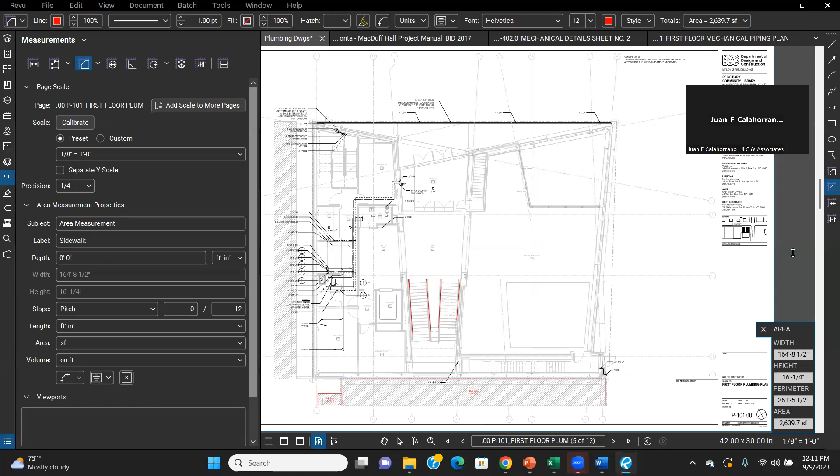Sure. Okay. Understood. I think to me the pace is good and I get to understand a lot. I've seen some of the stuff, but I don't have any questions right now. I'm pretty sure later on there will be some questions as you dig deeper into it. But overall, the class is great. We appreciate it. Awesome. Thank you. I appreciate that. So, well, we got people talking.

How familiar are we with Excel? I am good with it. Okay. I'm very good with it. Oh, perfect. Okay. So Vicky, so a lot of familiarity. And I don't do anything too crazy with it either. So I won't go too baby with it.

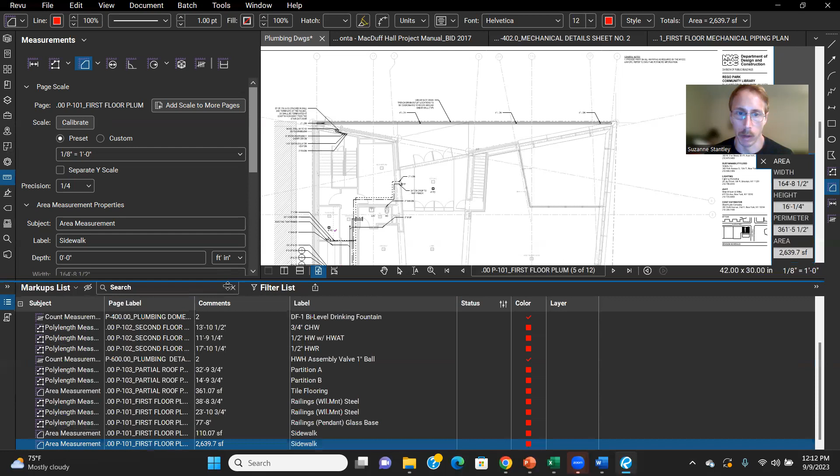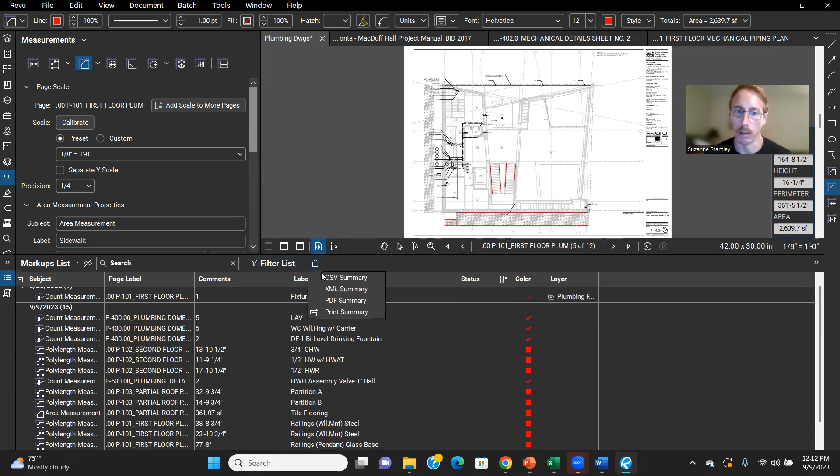So on the break, I just added a few more things just so I can have a little bit more of a report. So we're going to say we took off everything. We either got a linear foot count, an individual count, an area count, we got all these numbers for whatever scope of work. Again, this is Bluebeam. I'm not going to spend too much time on a Bluebeam specific activity. Whatever software you use to do your takeoff, 9.5 times out of 10, it's going to be able to produce some sort of Excel based output.

And again, if it's just a takeoff software, it's just spitting out numbers. An estimating software may spit out all your takeoff with values automatically attached. And that's the difference we looked at last week between a takeoff software and estimating software. We're just counting with this right now. So I'm not going to go into too much what I'm doing here, because you might not end up using Bluebeam, so that won't really be that helpful.

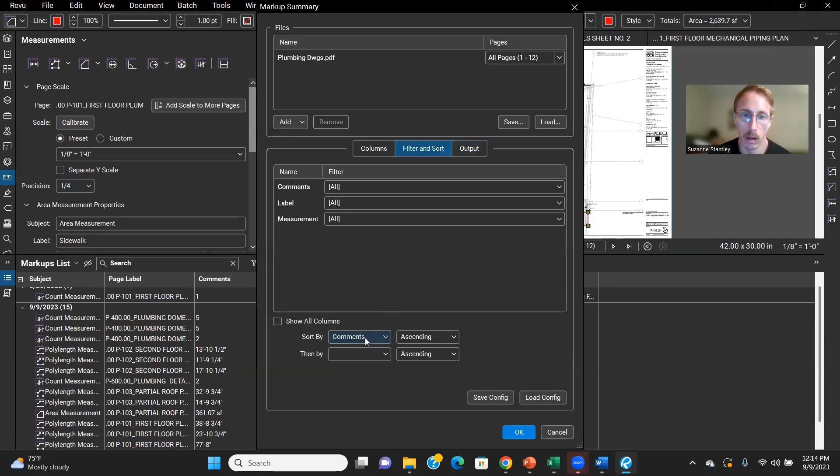But basically what I'm doing here is I'm telling it what to put on the Excel sheet, and then how to sort it out. So let's see what it produces here. I sometimes have to do it a couple times with Bluebeam. And you can see, this is the output for Bluebeam. It's fine. It's got everything I have here, but it's not the cleanest. There's ways I can play with it to make it a little better, but this is typically the output. So this would be kind of your rough counts on everything.

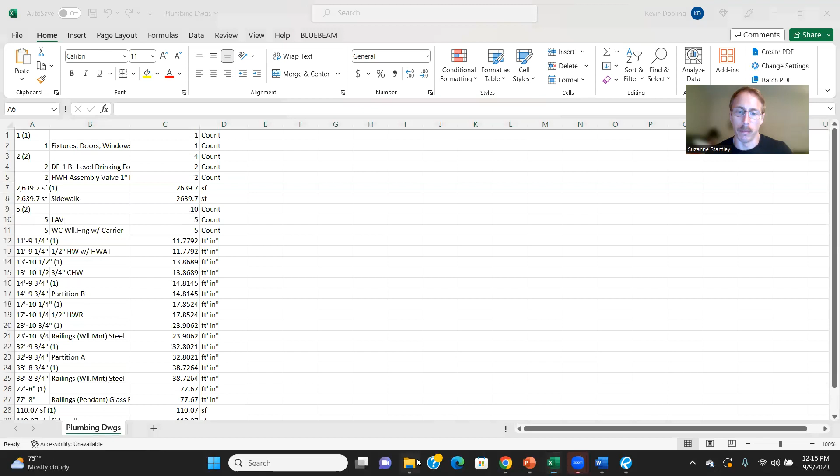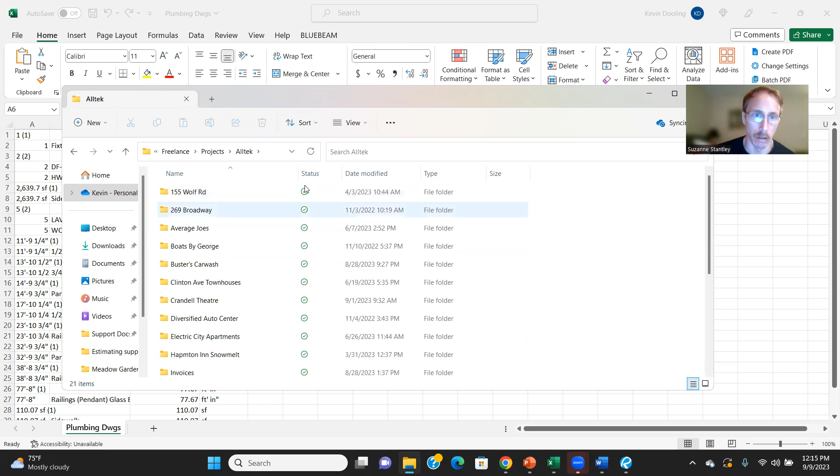Now, what we want to do is convert this information into numbers, into our actual estimate. And unfortunately, I do have an actual bid template, but as I mentioned, people put a lot of time into them, and even though we're in different states and I can't imagine there would ever be a big problem, I really just don't feel comfortable showing their proprietary bid sheet. But what I will show is kind of what I do to prepare for their sheet.

This is a step that is added because I do not have estimating software that'll spit out numbers. I need to get this takeoff, and then I create this sort of sum sheet for myself. So it's the same thing. I went through Bluebeam and I counted all these things. I've tagged them. I've got my quantities. Bluebeam didn't do anything after ABC. These were things that I added.

And this is more or less how their template is broken down. They've got a section for piping totals, a section for fixtures, a section for demo, cut and patch, testing and flushing. The company that I did this for has a pretty generic bid sheet.

There's pros and cons to that. I think it borders on too generic. They should have, maybe, a section that breaks out domestic water from sanitary. I have that information here, but if someone is just taking a quick look at one of their jobs based on their sum sheet, all they're getting is one line item for piping totals. But you can see that would be my process. It spits this out.

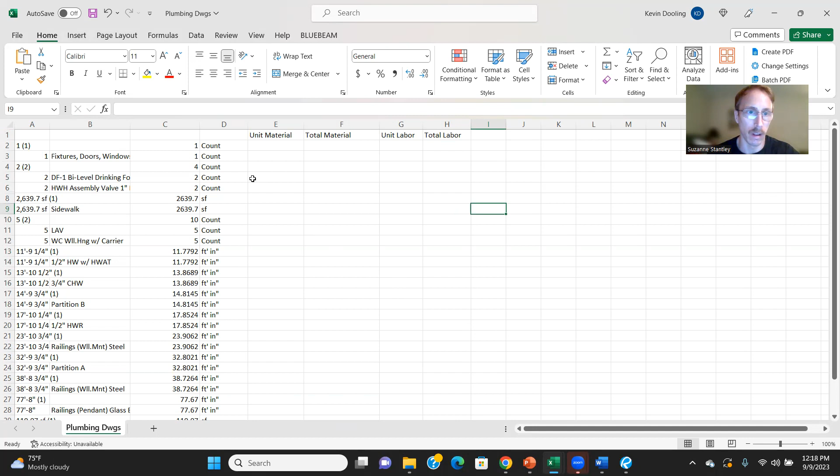So for each drinking fountain, $1,800. My total material is going to be equal to that times my count. This is going to be the same all the way down. It's going to be money. So many little things everywhere. It's going to be the same equation. So if you're familiar with Excel, you can set up a basic takeoff sheet relatively quickly.

So this is just going to be hours. I'm not putting that in material. Whenever I do a sum sheet, I collect all my hours on this kind of worksheet. And when I plug it into my final sheet, the final sheet has a wage rate. So you can see on this one, I'm calculating the total hours, because when I put all this information into that company's bid template, at the bottom, they have a spot where my total hours are multiplied by whatever they pay their field personnel.

And that way, if it's prevailing wage, or if for some reason they have to change what they pay their field personnel, it's a very easy change. You just type a different number in a box, and all the hours on the job get assigned a new wage rate, and the number comes down. So let's say we did that here. I'm not gonna do it. I went through and I put values to all this stuff, and I came out with a total. It's getting too busy. What did I do wrong here?

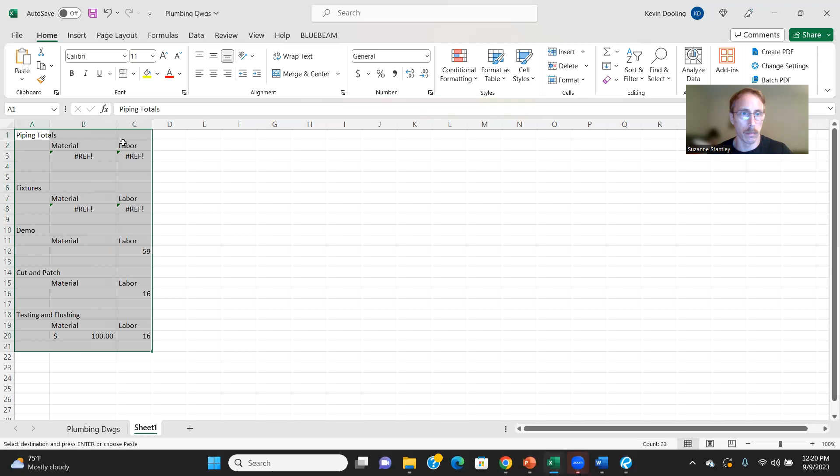Now we're just going all scopes. So we got some partitions. We totaled that to be 24,000 and 547 hours. We did some tile flooring. We figured it was gonna be 12,000. It's gonna be 365 hours. I like my things correct. All right, so let's say we did our kind of rough takeoff. We assigned values to all these numbers. And this would be something you'll have to do if you only have a takeoff summary or a takeoff software.

If you invest in an estimating software, this sheet that it spits out will have labor and material units already on them and totals already there. So it's a big time saver. You'll probably have to adjust whatever it spits out to fit your market. But that's the step you're paying for when you upgrade to an estimating software, where now I do all this and then I'm gonna put it into my final estimate. A piece of software can save you that.

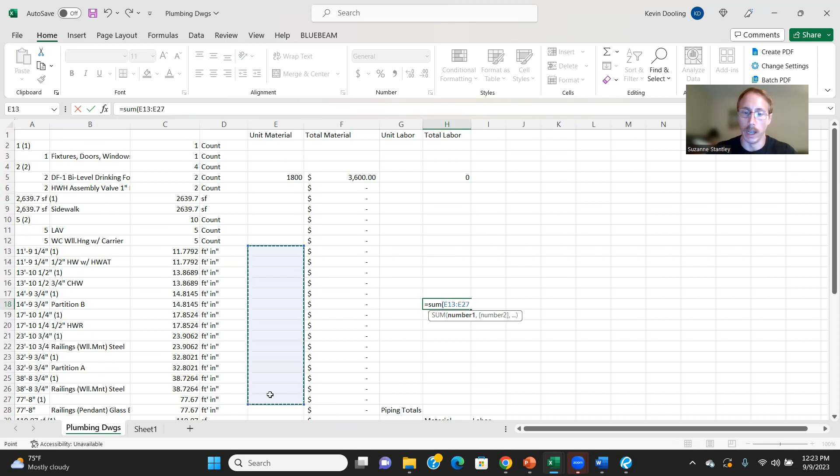So this is how I broke up my estimate. I broke it up by piping totals. I broke it up by fixtures, demo, cut and patch, and testing and flushing. But this is just for my final bid template or my final calculation sheet. If I needed to know more about my piping totals, I can go back into my takeoff, and because I labeled everything, I could just quickly do an equals sum of everything in domestic hot water. So if I needed to reference this later, I've got that information.

But on your final sheet, your quick reference sheet, and the sheet that actually spits out the number you're going to give to your client, you don't necessarily want all of this stuff on there. Your final sheet should just be super quick reference. So what I'm going to do, again, I'm doing this quick. This is something I would encourage you to really take your time on, to make it yours, to make it make sense to you and what you do, but I'm just going to go super quick. So I'm going to have a material total. Again, more references. The more references, the better for me.

And hell, you might want to be thinking, if you are hiring somebody, is this sheet something that's only going to make sense to you? That's not great either, you know? So part of when you're building this sheet, if you can nerd out on it like I can, I enjoy doing this sort of stuff, is, you know, not only does it make sense for you, is this something that you could teach somebody relatively quick?

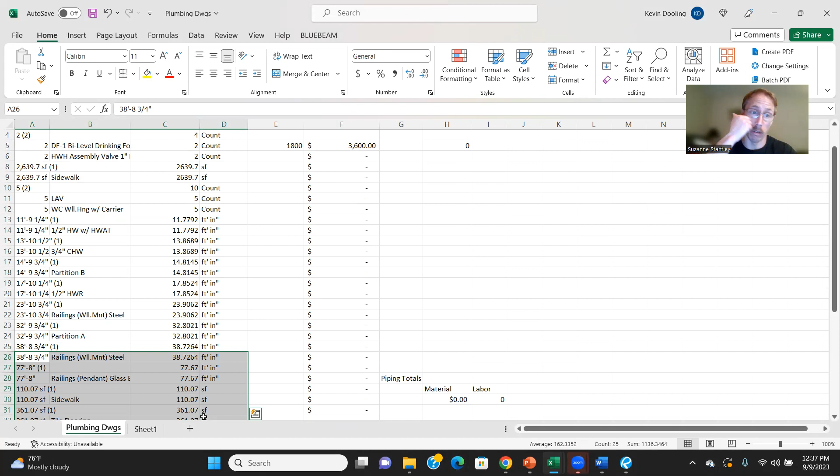For where you get your labor and material units, some of this stuff is going to be subs and vendors. You might send out this sheet, and I bet any material vendor would love this. So if you're doing railings, like ornamental steel or any of that sort of jazz, they might prefer to do their own takeoff, but you can tell them I've got 40 feet of wall mount railing and I've got 80 feet of railings with a glass base. And then you can also send them the drawings. Leave this blank until they give you a number and then fill it out with their number.

But you might have to install it. Those labor units are something from your experience. You might be able to look at that railing and say, yeah, it's about 80 feet, 2 people should be able to take it off in a day. Okay, if that's the way you want to write it in here, 2 people in a day. Is this my labor total? 2 people in a day would be 16 hours. So you could just say equals 16 hours divided by the length. So you're at 0.205 hours per linear foot.

And then maybe start keeping track of that sort of thing, using your experience to figure out what are my labor units for this different stuff based on what I know. Again, there's lots of programs out there that have labor units for all this stuff. RS Means was the one we talked about on Wednesday. That is the most general that I know of, a general pricing program, and you see it referenced a lot. I don't know if it's the best for bidding. It tends to be on the conservative side of numbers, but it's there. I would say this is better off being slowly built on experience, maybe supplemented by some sort of labor book.

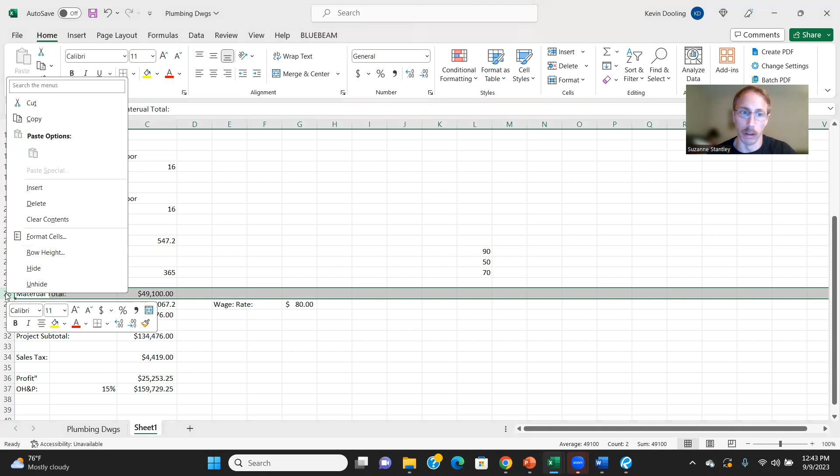A good sum sheet like this one, or not like this one because we did it so quick, but a good sum sheet that has all these functions will save you time and heartache if you get into a pinch. And there's all sorts of things that could be added to this bottom. You might have your project manager. You might add a section in there for that. If it's a super big job, they might require a safety personnel. You can have a line item for safety personnel. Maybe it's 90% blank, but it's there if you need it, and it's all linked up so that if you do use it, it all links up well.

This kind of bottom thing, that's where you're kind of accounting for the unquantifiable sections. And actually, realistically, you're almost definitely going to have a section for your subs and vendors. And that won't necessarily be a labor or a material total. It's going to be something you bought. Or, vendor will be in your material, I'm sorry. But if it's a sub, they're going to have their own labor materials.

You might have a sub category and just add up all your subs, whoever they are. If you're a GC, you're going to have a billion of them. If you're a plumber, you'll have maybe an insulator and a few others. Electrical, you might have telecom and security and fire alarm under you as subs, etc. So you might have a sheet. Again, we've got a whole class on subs, so I don't want to go too far, but you might have it continue and just have subcategories and different line items for all the subs you typically use.

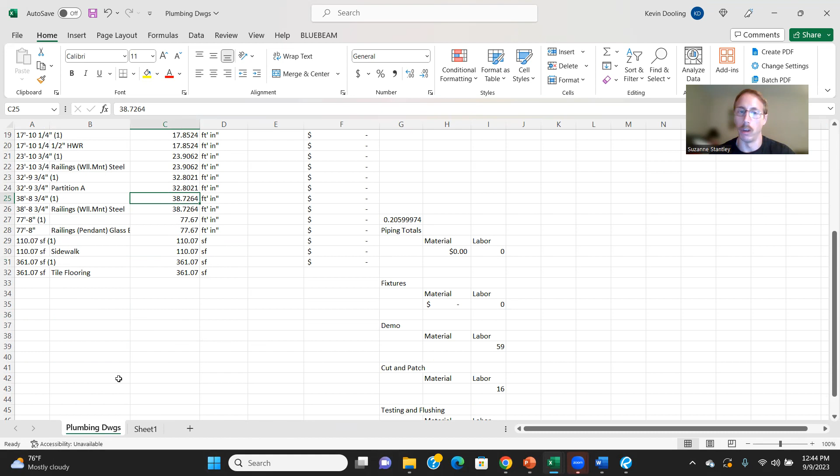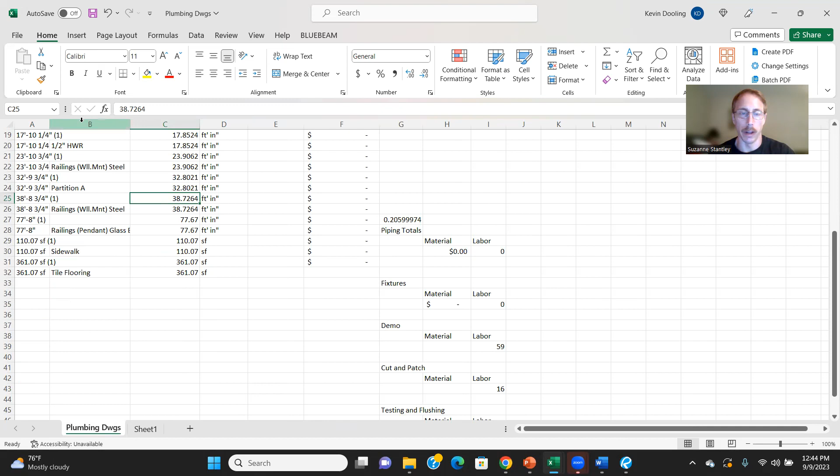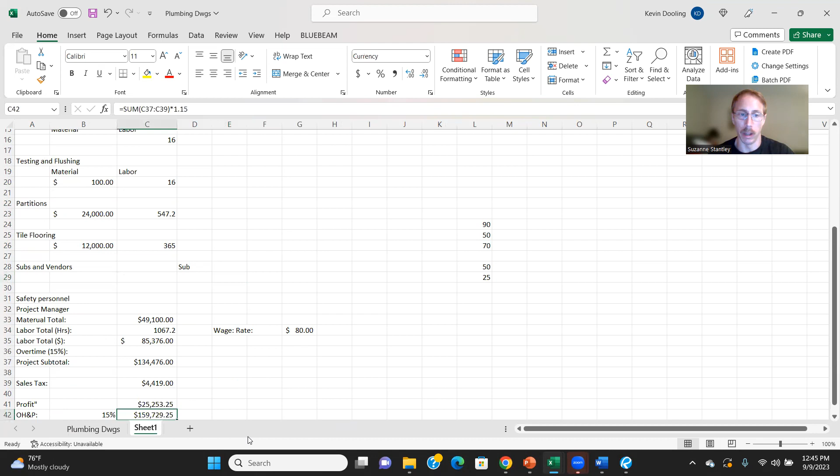So that is what I wanted to go with, kind of taking your counts, applying units, labor, material units, organizing all that information into a way that is helpful and a quick reference for you and produces a number that you can trust at the end and that you can change relatively quickly.

One thing, real quick, is if you are working on a project that is not a complete set of documents, there are some other ways to do estimating. Usually they're going to be square foot numbers. And those are much trickier. If you are the type that likes to put together an estimate based on your experience, that's kind of your time to shine. Because it's just going to be a lump sum number. Usually your domestic water, partitions will be one lump sum number. Interior construction might all be lumped together.

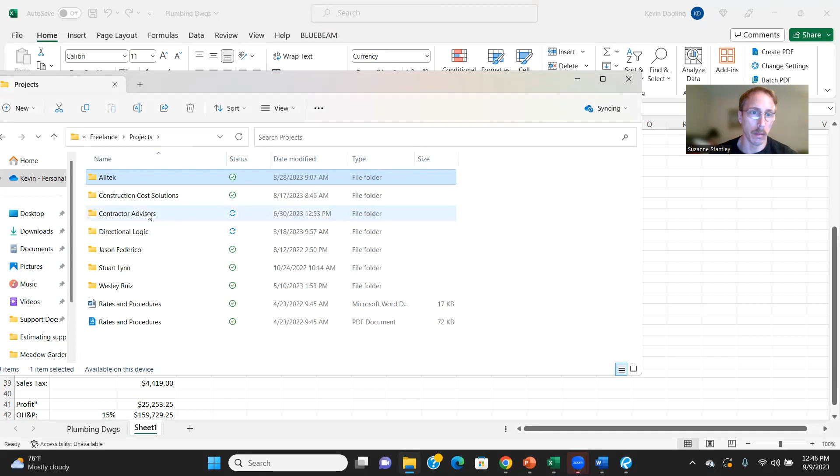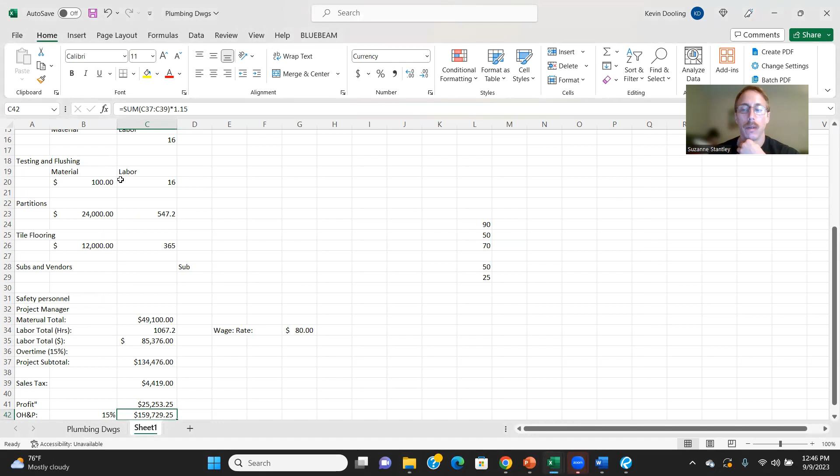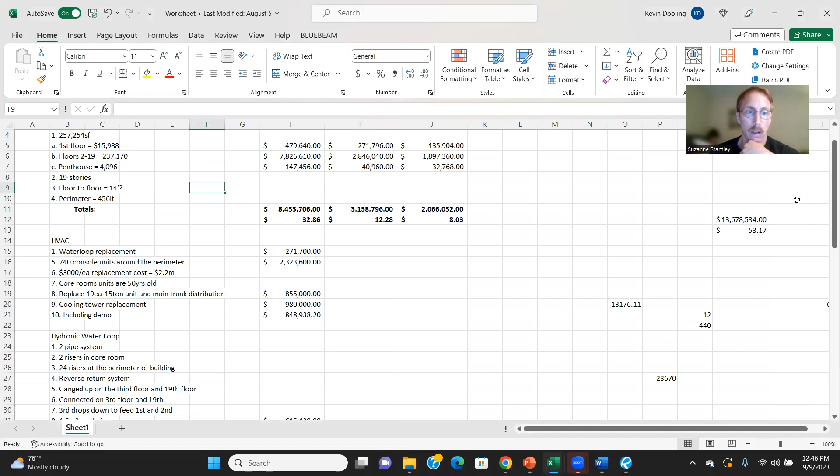I did want to show an example of an estimate done where there was nothing to take off. So this was a big tower project, and there were no drawings. There was just a narrative with square foots. So this was kind of the worksheet I developed just to organize my thoughts and do a takeoff on something that didn't have any drawings.

And you see here, I went through the narrative. All they provided me was almost a spec book, but the spec book told me everything that was on the project. So they were just telling me they're replacing the water loop. There's 740 console units in the perimeter of the building. They're telling me to carry a certain amount for that up here, which is nice. But basically, it's a whole different type of estimating because there isn't anything quantifiable. There's no linear feet unless they tell me what it is. Like here, 110 linear feet each floor.

But when I did this estimate, when I did this takeoff, I actually was just reading the narratives and putting a tag anytime I read something important to me. So when I read the narrative and it said you're replacing the water loop, I took off that sentence and said I'm replacing water loop. In that paragraph, it says there's 740 console units at the perimeter. I took that off as a tag labeled 740 console units at perimeter.

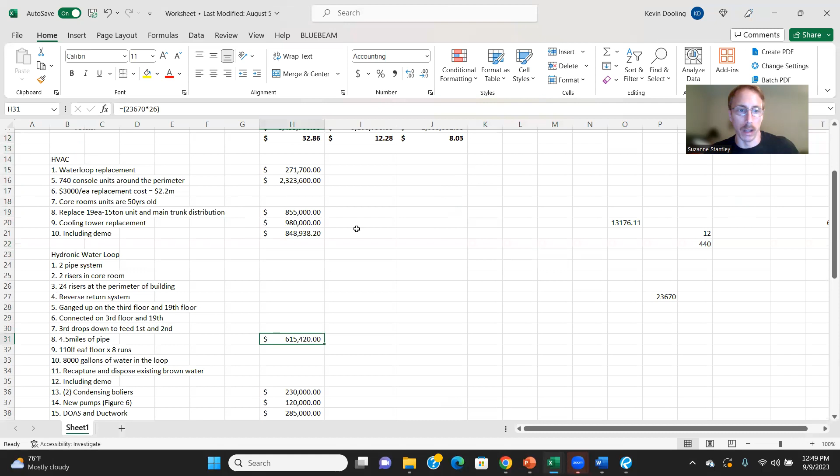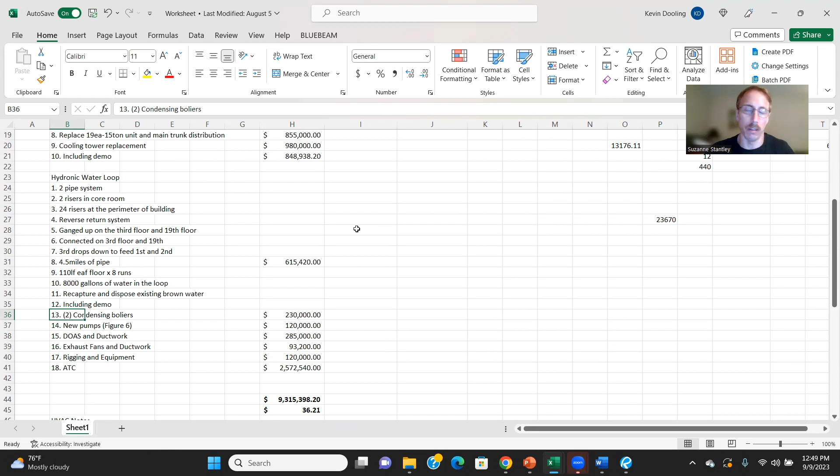In a conceptual, that's just not the case. All this stuff is up for debate because it's kind of based on experience and whatnot. But the point here is I'm still accounting for things that need to be accounted for, even when I don't have drawings. I'm still reading through and doing a takeoff of sorts, if anything, just to organize my thoughts. And it does provide some sort of backup.

So even on this one, up at the top, I really just did a really rough dollar per square foot for the HVAC, plumbing, and sprinkler. Just really rough on what do I see in the area, historical data, that's all in play on an estimate with no real finished documents. But that's not going to make anybody too happy if I just go, yeah, I figured roughly $32 a foot, because it doesn't let them play around with it at all.

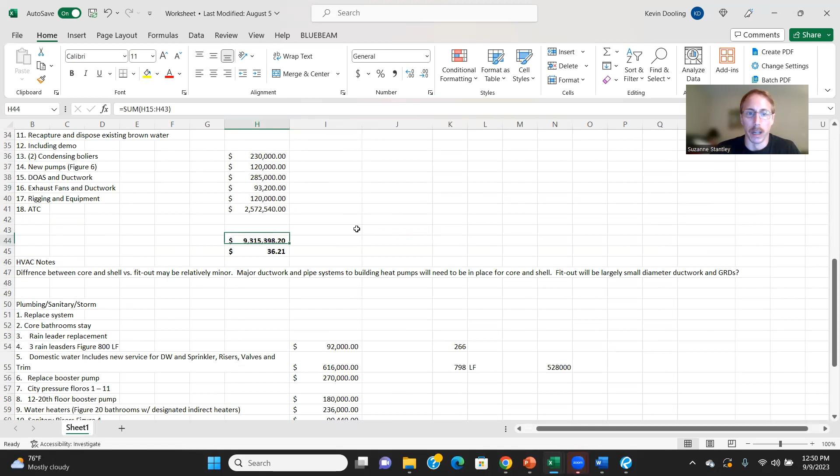So then I just expanded it. I went down here and I go, well, what if I actually took off everything they're saying and tried to apply it to a number? Where do I end up? And then I compared them, and I was within $1 million or so. So I compared it to what I did when I figured a rough square foot number, and they're not too far apart for a job this large. So I combined two different estimating things to check myself.

So this is the most basic form of estimating: all right, what's the square footage of the building? It should be roughly this amount per square foot. Here's your number. Okay, if you've been doing it a long time, it might work. Maybe you are just like Rain Man with these numbers, and you can spit this number out and it's going to be right. They're out there. I've worked with a lot of people that are super smart that way. The fact is that no one else knows how smart they are.

So when they start asking, well, how'd you come up with that? Them just saying, oh, trust me, it's not going to fly. Having some sort of breakdown, well, I figured 260 hours on 19 floors at $55 an hour, I figured this part of the equation up there. I can at least talk about how I came to that number. And that's appreciated, being able to have that conversation.

And not just appreciated, it's going to be helpful, because maybe they go, actually, we're not doing the cooling tower this round. Well, instead of just some big lump number that I figured, I can actually take out that cooling tower, get a new lump sum total, and tell them, all right, now I think it's this much.

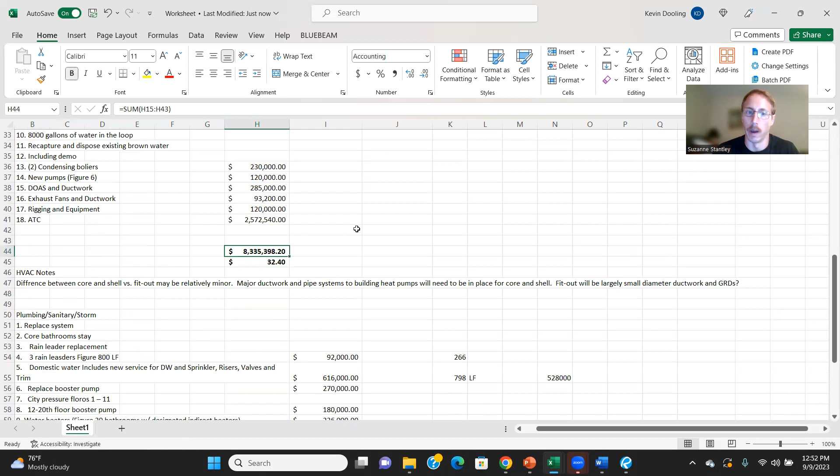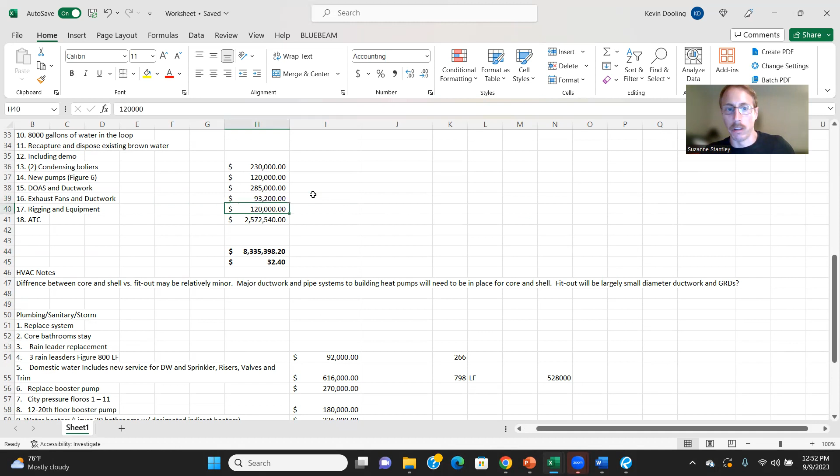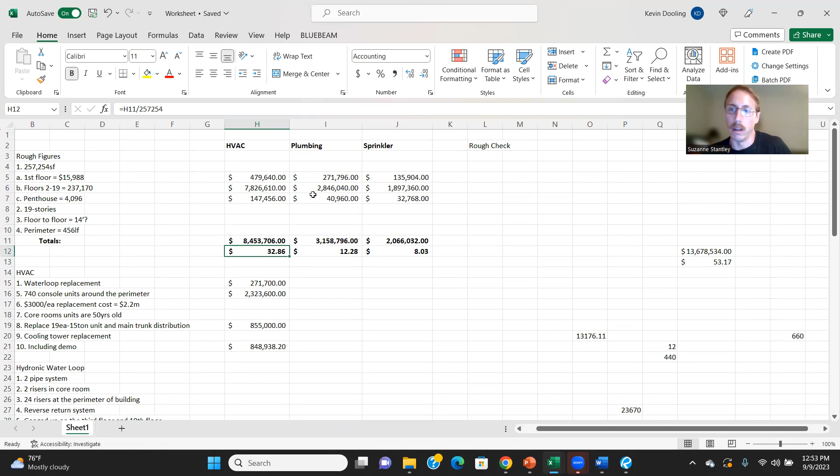So even on a conceptual estimate where I'm not counting things, you're not spending 3 days literally just counting things on drawings, there's still something to be taken off. There's still benefit to having some flexibility in your number, to not just doing what I did on top, even though I use this as a check, because I still think, yeah, that's roughly where I should be based on what I saw in that area. But I know that's not going to fly, and it's not really what I get paid to do. So I provide a more detailed breakdown in case they want to eliminate an element, or in case they think I'm way off on an element.

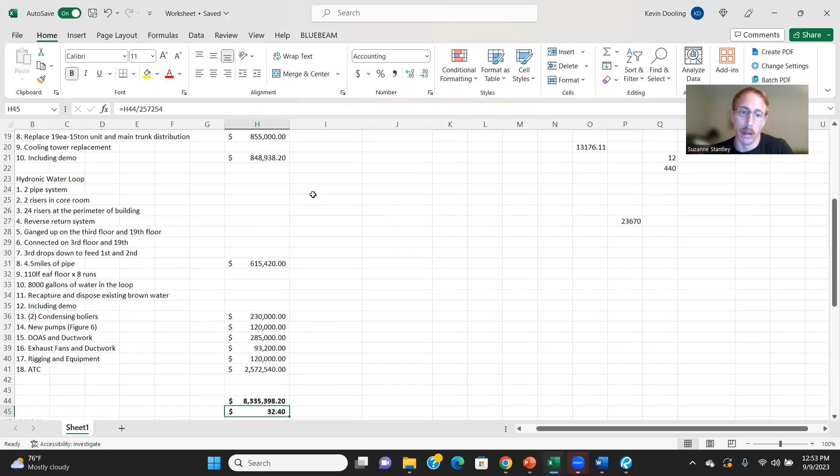So that's a conceptual estimate that I did for somebody. There were no drawings. It was just a bunch of paragraphs on MEP. Let's see here. I do want to show you. So this is more for pre-bid. I do consulting for architects and engineers, which is a little different than construction, but this is my personal sum sheet for what I do.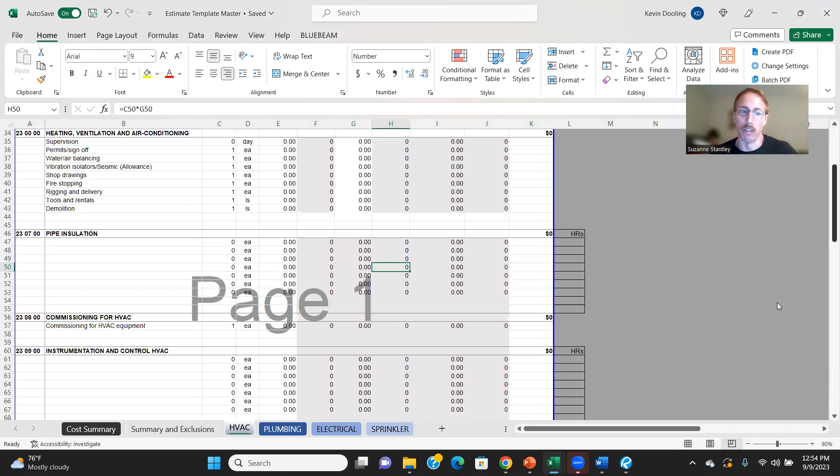And again, this has more of a presentation value than you'd really need. This is designed so that someone can review and look at everything, but you can see I've got it broken up by scope. I've got these things automatically in here, zeroed out, but they're here just so I know, so I'll never forget to put a field office allowance because I have to see it every single time. So I must know there is nothing if I put it there. For plumbing, I know to make sure I do something for trenching. If there's below grade work, I put a little tag in there.

The CSI codes I use are all the most typical CSI codes. So I just threw in some generic ones. They're not all of them. Plumbing is typical enough where there's very typical fixtures. So I just went ahead and this is my blank template. I just keep these in here so I don't have to type it every single time. They're that typical. And then that's all it's saying. Then over here, these markups, I apply to all of that. So again, this is kind of pre-bid. So all the design contingency.

I've got market, depending if I do a lot of projects in New York City, which I imagine similar to Chicago is, oh, no problem. Thank you, Juan. Is expensive. So depending on the city, I might want to mark it up a little bit. And then finally my overhead and profit.

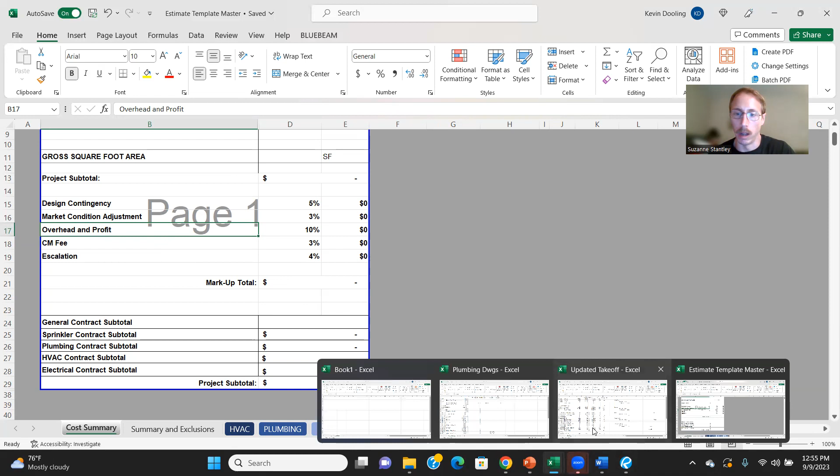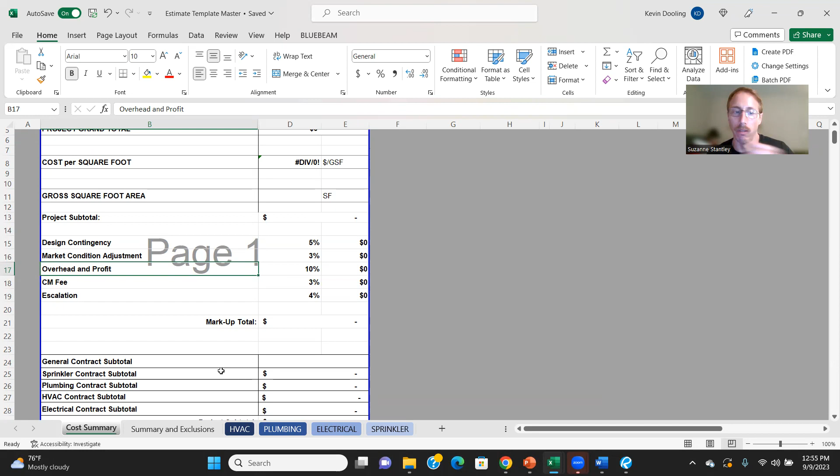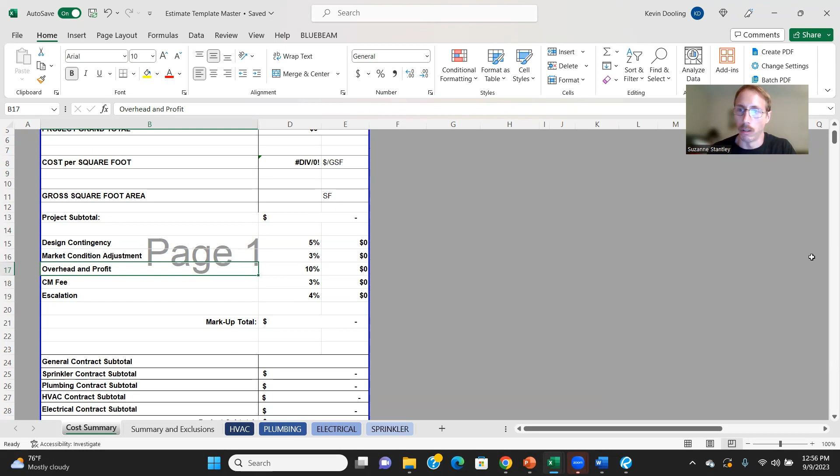So you can see it follows roughly the same thing we did on the other one, where it's all our information in tiny pieces, and then I'm condensing it. Again, this is a little different because this has more of a presentation value than yours should. Yours should just be functional, it's easy to read, easy to teach, and it works for you. How it looks doesn't really mean anything. But yeah, it's similar. This is the one I did.

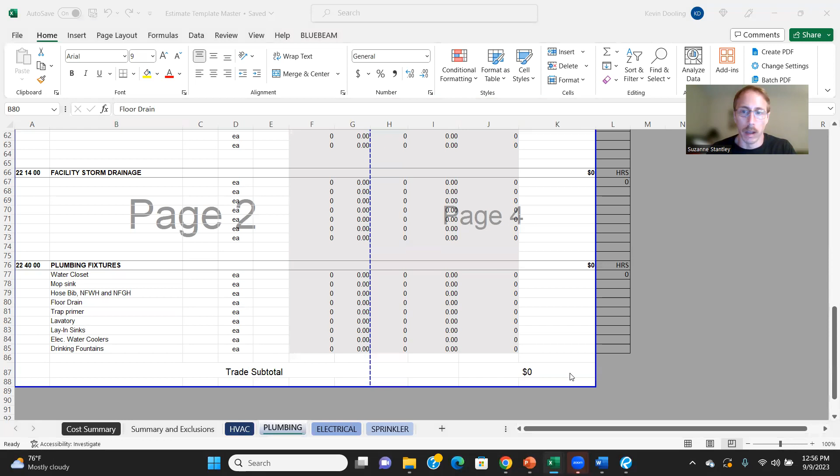All my labor gets put to the side here, and all my labor is linked to the wage rate, which is up here. So whenever I put anything down here, how many hours, it multiplies that by that and by the quantity, and it fills it in automatically here. And it all works like that. Oof. I think I got through that. I really wanted to spend a lot of time on this summary sheet, but we did a decent bit.

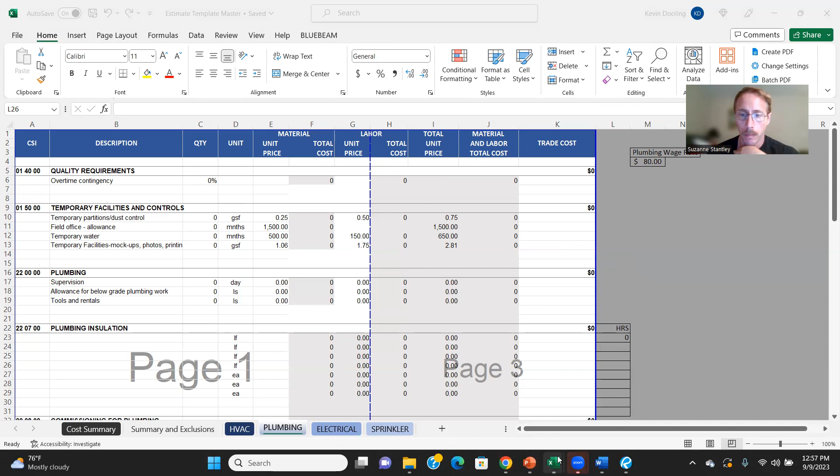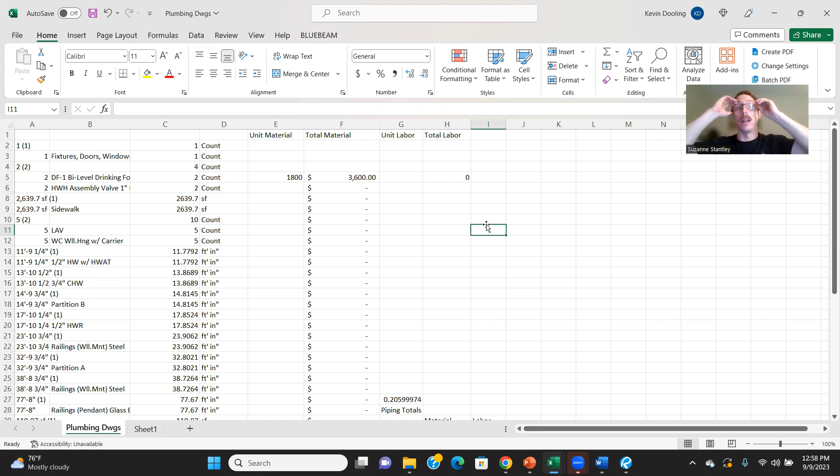Yeah, so that's getting into some good stuff. So job code, as far as I know, will change per the job you're working on. There would be a couple ways. So you could set up, again, depending on the software, you could probably set it up to spit out things in a job code. But let's say all of your, I don't like this one. Let's go to a cleaner. All your domestic water or something, all of this has a certain job code. You would have a legend.

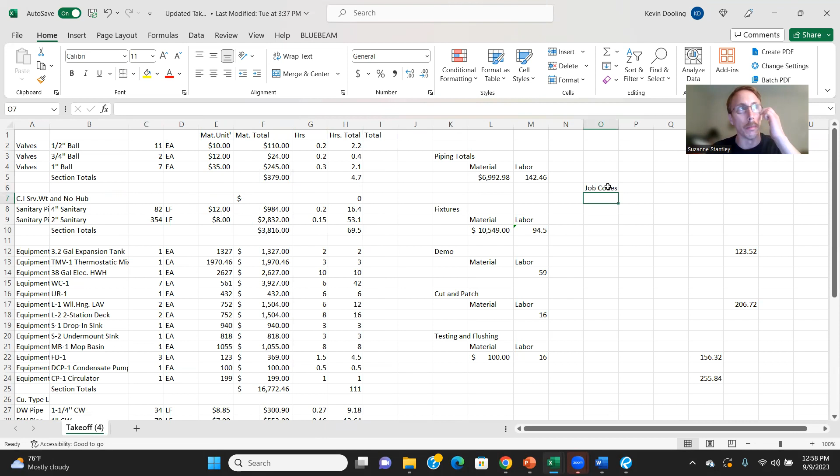I don't know if job codes would be more by scope or floor, or it'd be a lot, but 1, 2, 3, 4. First floor plumbing. I'd go to your biggest takeoff, and then pretty much just, see, why is this not going down? It's something you would have to know as you're doing your takeoff. Really, I guess, because it would probably be in my tag.

If I knew that I had to break something out by job code, depending on how that job code is going, I feel like they can be as broad as first floor plumbing, or they can be as specific as first floor bathroom 102 water closet. From what I've seen, I feel like they can get pretty wild. But it would either be something I addressed in the way I tag it.

So if I knew that the job was coded by an area or by floor, instead of expansion tank, it would be first floor, mechanical room B, expansion tank. And that's because I know that the job codes are by floor and by room. Or if I have that job code legend, I guess I would just put it into my tag at the front.

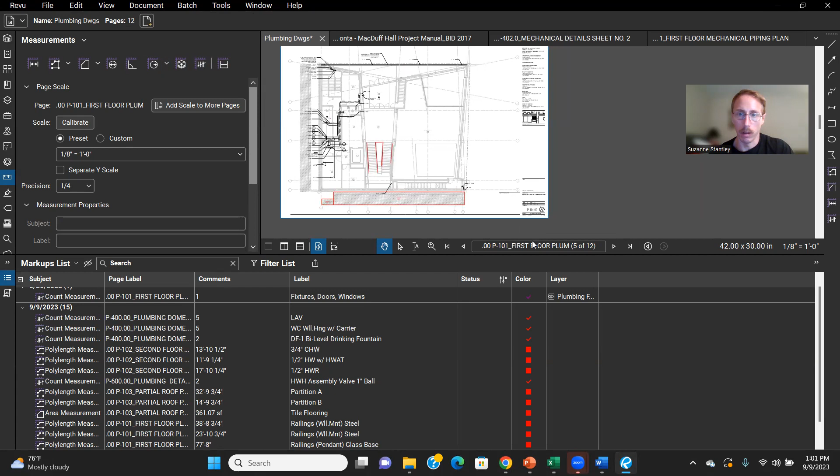And just have all my tags by job code. Yeah, so road or excavation, you're going to be using mostly your volume takeoff, but let's see. The problem is I don't have a lot of good civil drawings. But it's going to be the same process, except if you're doing roads, you're going to have square feet of asphalt, square feet of concrete or sidewalk. And then you'd be checking your details for depth.

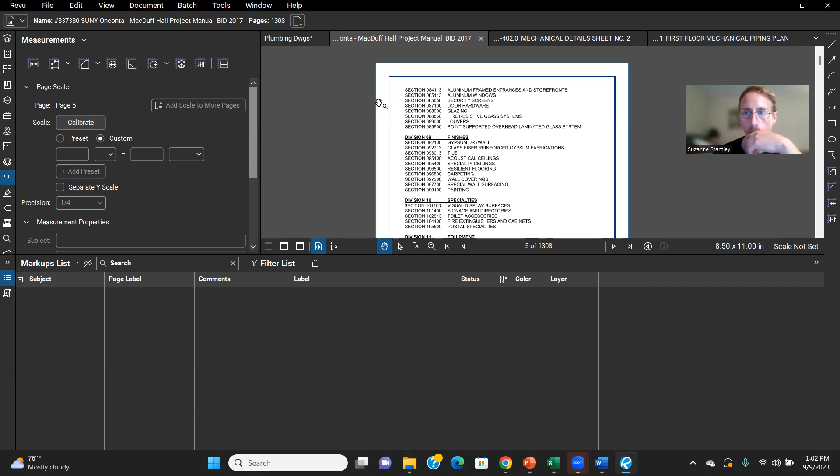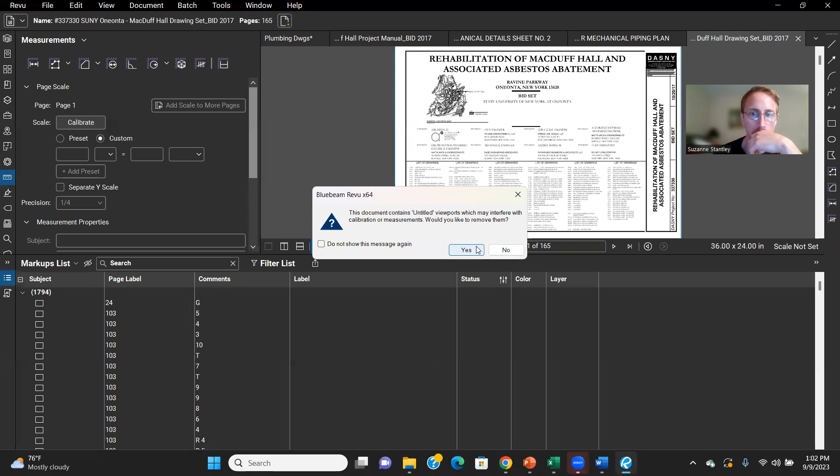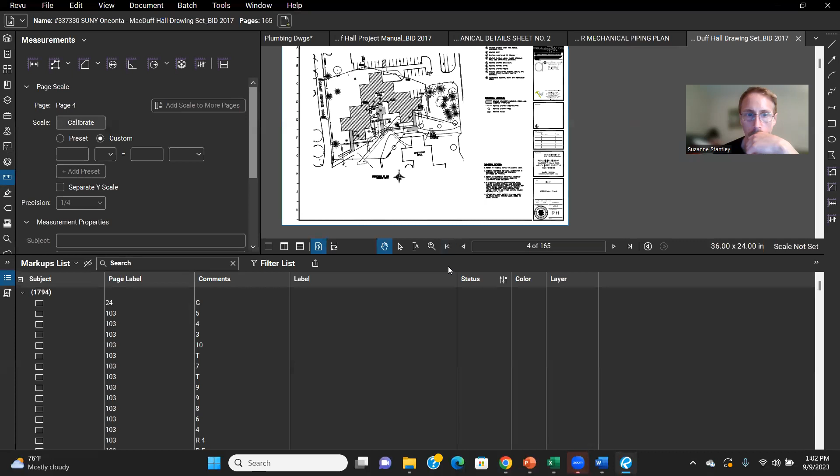Hopefully this has. All right, so a site plan. Not quite road, but a parking lot still counts. I don't know if I've got a good representation of a road specifically, but if I were doing asphalt for the parking lot or curbing and all that jazz, it would be a similar process where I'd do a linear foot of my curbs.

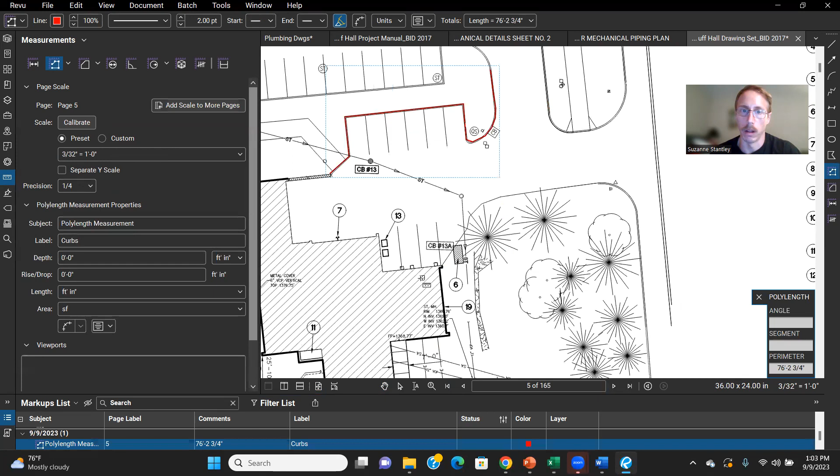Usually the scales on site drawings are a lot larger. I do an area, asphalt, paving. Do a better job of staying in the lines than I just did. When I go through, that's probably sidewalk. I'd create an area for sidewalk.

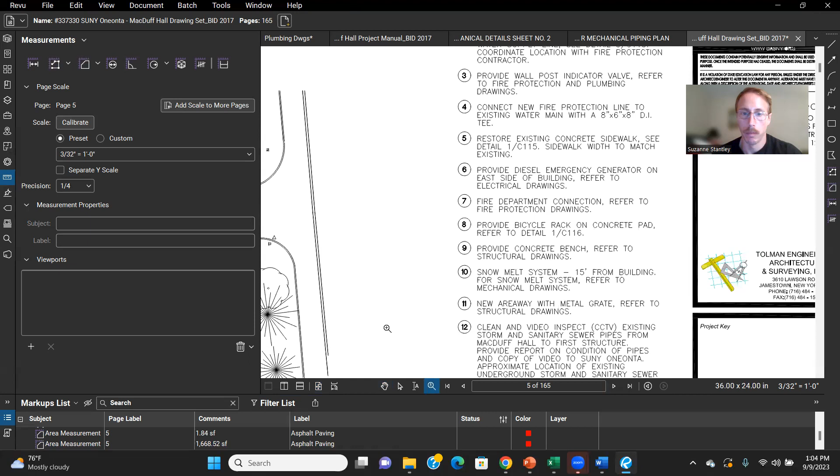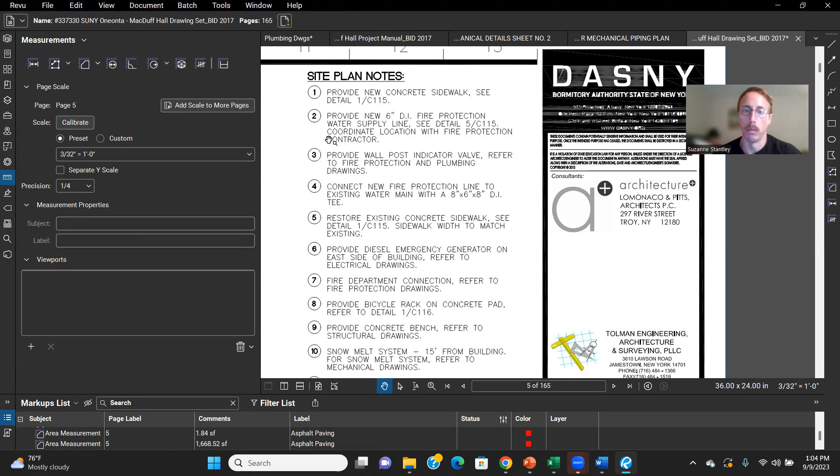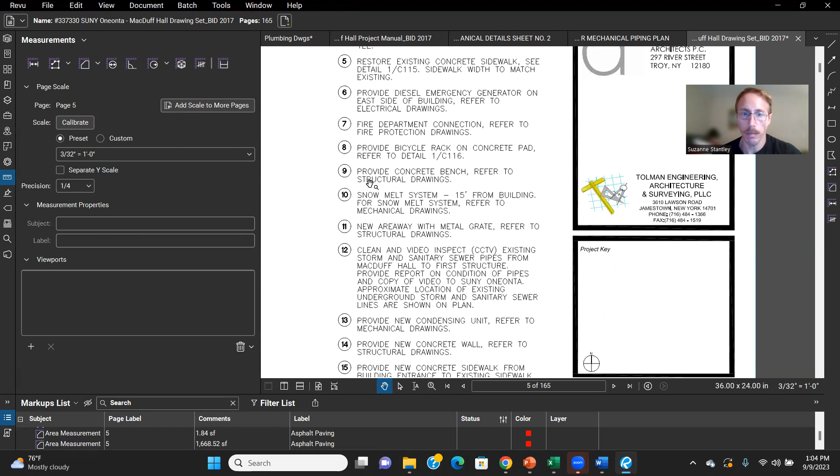If you needed to know depth, this kind of goes back to the blueprint reading classes. So this is giving you your overview. You'd be reading all of these notes that apply specifically to site work. See it? Yeah, they do. They're telling you to provide new fire protection line. Concrete bench, concrete sidewalk. And then there will be details.

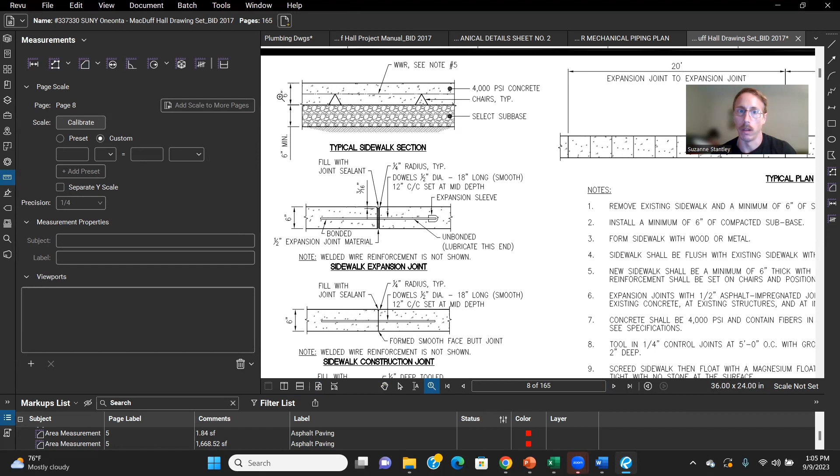So here are site work details. So that was your overview from 100 feet. But if you need to know depth, this is where they're telling you all your sub-base information, the depth of the sidewalk. If there were a road on this project, you would see something very similar, a detail like this, that's going to tell you your sub-base and the depths. And if you didn't find the information you needed here in terms of depths, again, everything should be provided with a depth. This one, I'm not seeing one.

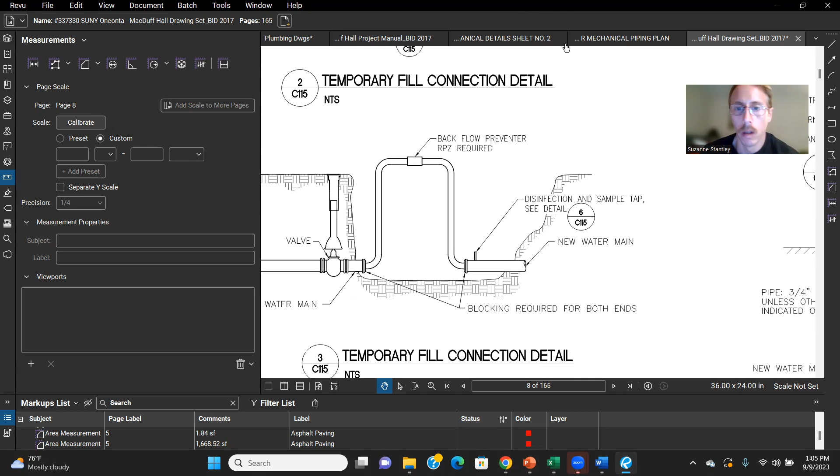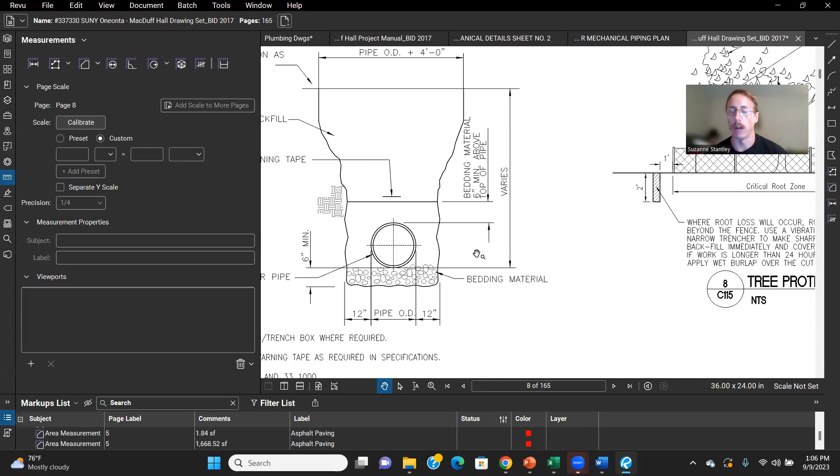But it's going to be the same kind of process as we've talked with other ones, where you're going to have that plan view, that first one where we were taking off curbs and asphalt, and that's going to be your most overview. And then once you have a real question about, well, how deep is that pipe, or how deep is my sub-base, you're going to have a detail page like this that's going to give you more information. And the software you would use would have a volume takeoff. Now this does have it. I've just actually never used volume, so I'm not exactly sure if I'll get what I want.

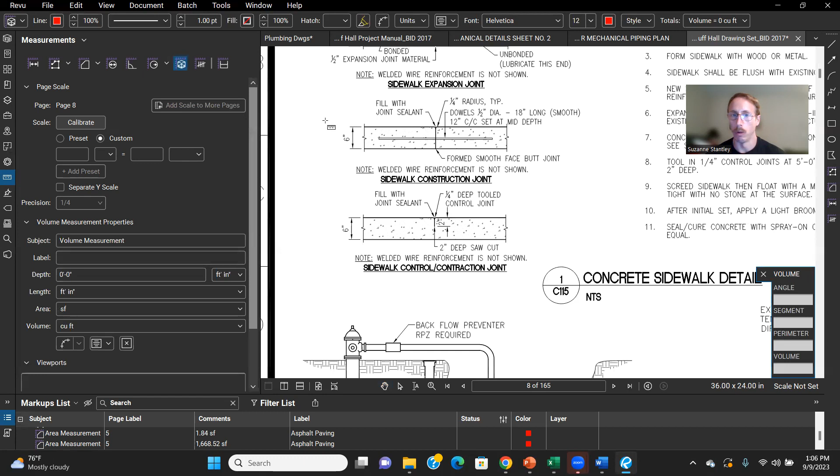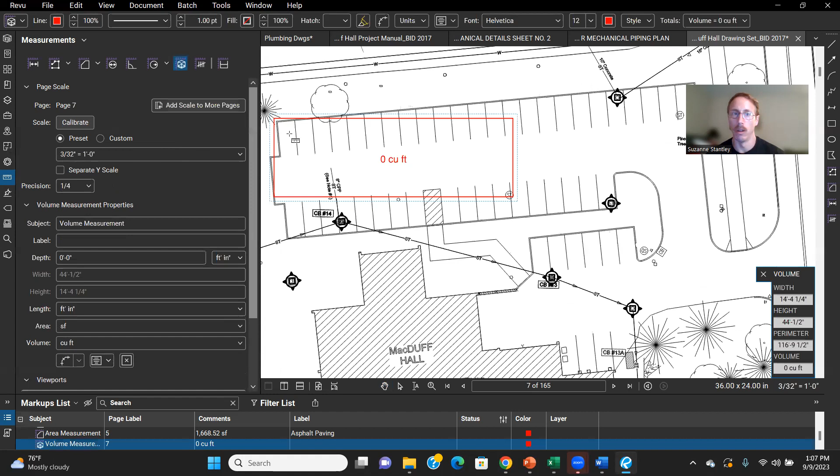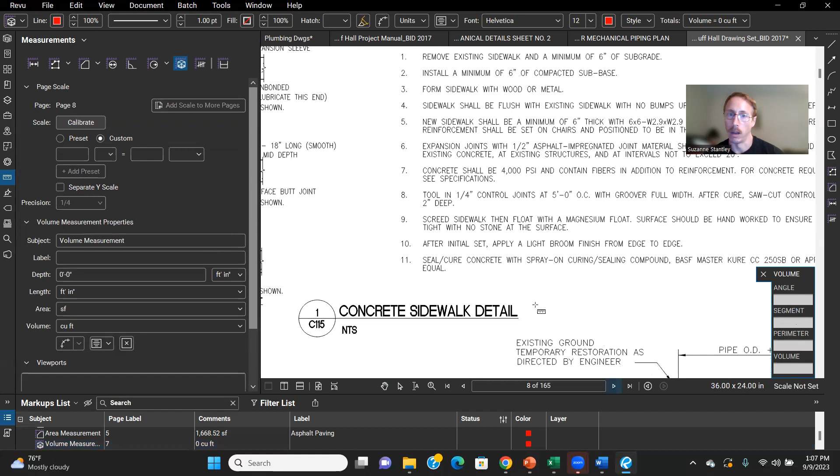But a better piece of estimating software will give you the ability to just go and do an area takeoff like that and assign it a depth. So whereas before it gave us the square footage of this circle or of this rectangle, on a volume one, it gives you that square footage, and then you tell it the depth and it gives you a volume. And that's what you would use for excavation, I'd assume, is a volume. And you would get that again by cross-checking your details.

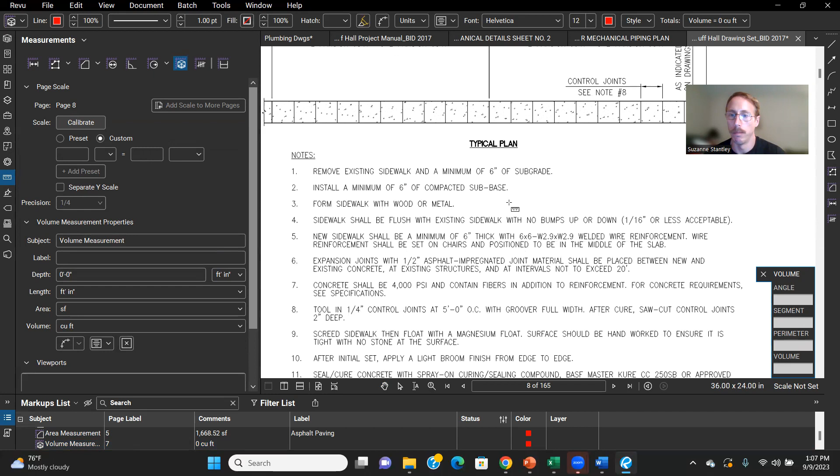So again, I don't think this has a road, but it has sidewalks, and it's telling you your sidewalks are 6 inches thick, and there's a 6-inch sub-base, the PSI on the concrete. Yeah, so again, it would be the same kind of process. You're just looking at your S and/or C drawings. These are C, yeah, they're either going to be site or civil. Yeah, hopefully that helps. Is that what you're looking for? Because in terms of turning it to your sum sheet, it would be the same, except instead of linear foot. Thanks, Mo. Instead of linear foot, you'd have volumes and all that jazz.